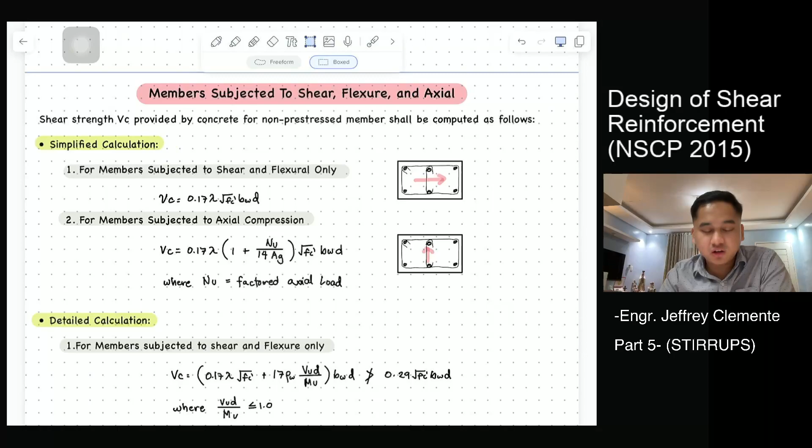So where VS is the same and VC here will be changed. Our VC where member is subjected to shear and flexural is this one: 0.17 lambda square root of FC prime BWD. That's it. But if it's subjected to axial compression, you have to add a factor of 1 plus...

NU over 14 AG. What's NU? NU is the factored axial load. AG is the gross area. That's it, that's all there is. So this is for the simplified calculation.

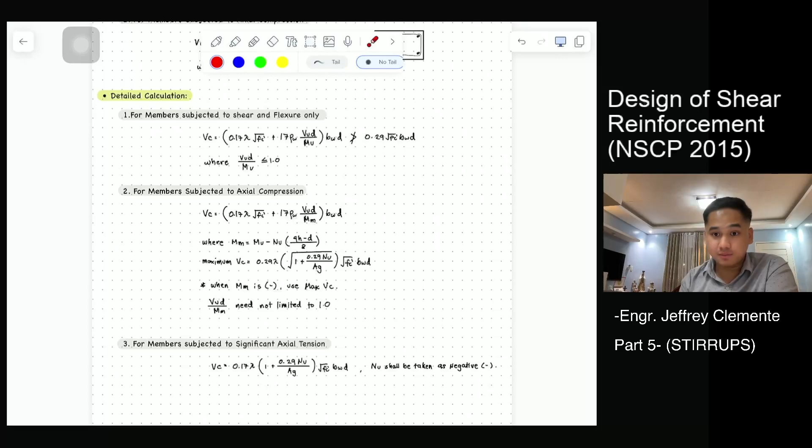For members subjected to shear and flexural only, you have to solve this formula: 0.17 lambda the square root of FC prime plus 17 rho W VUD over MU, times BWD.

But it must not be greater than 0.29 the square root of FC prime BWD. It's not allowed to exceed that. Where VUD over MU must not be greater than 1, it must only be less than or equal to 1. Sir, what if it exceeds 1? Then the answer is 1.

That's it. So when you see this, what is rho? Rho W is just AS over BD, right? In design, that's still from the flexural part. Let's repeat: VU is the factored shear, MU is the factored moment.

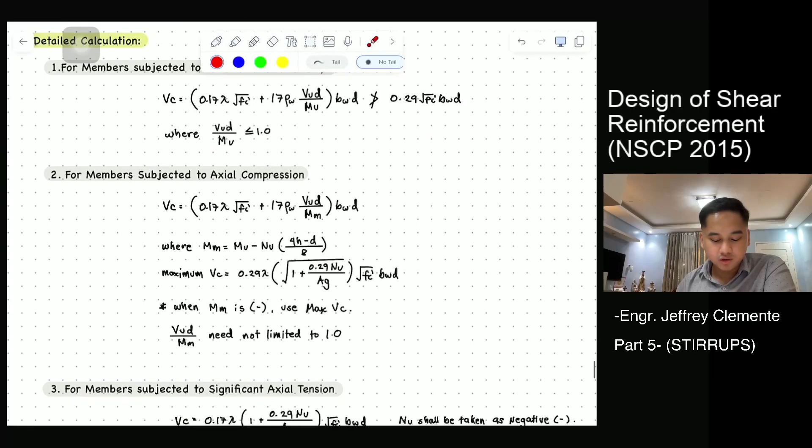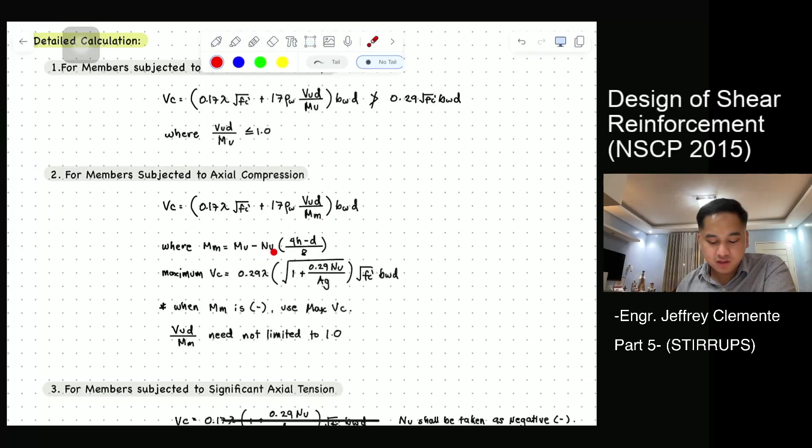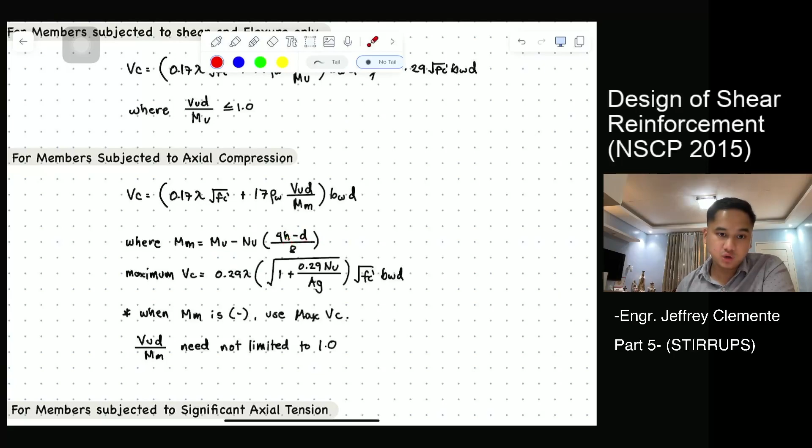What about when subjected to axial, for the detailed calculation? It's still the same, only this MM changes. Here it's MU, here it's MM, where MM is MU minus NU times (4H minus D) over 8. The NU is the factored axial load, MU is the factored moment, H is the height of the beam, D is the effective depth, over 8.

That's it, but it's not allowed to exceed this. This is the maximum: 0.29 lambda square root of 1 plus 0.29 NU over AG, multiplied by the square root of FC prime BWD. Where...

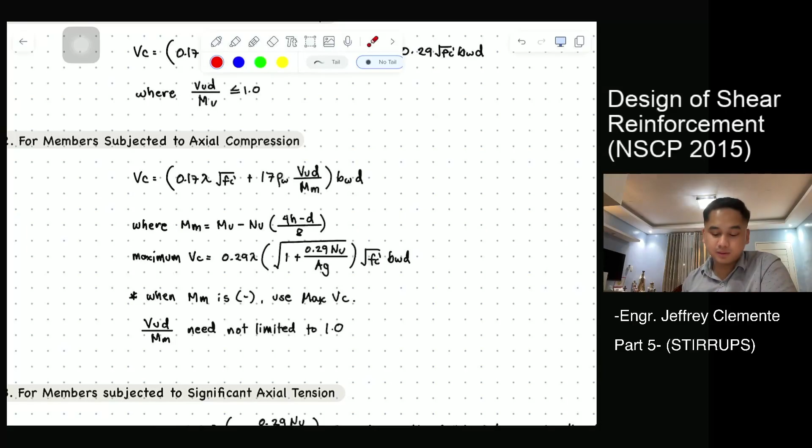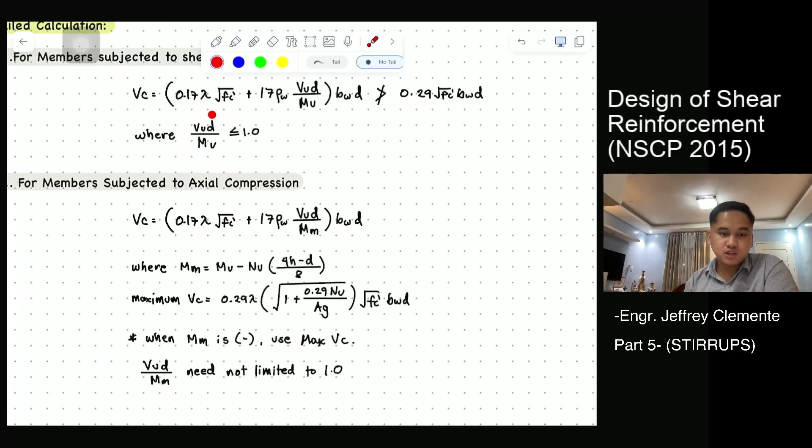Okay? But here, unlike there, VUD over MU must not be greater than 1, it's only limited to 1. In this case, VUD over MM need not be limited to 1, it can exceed 1.

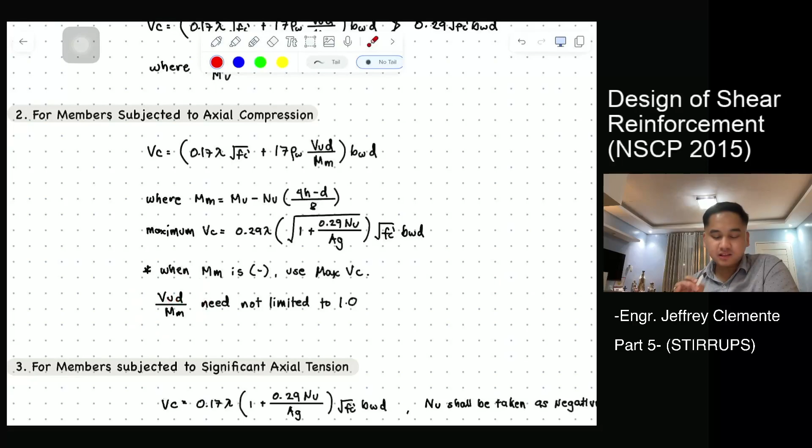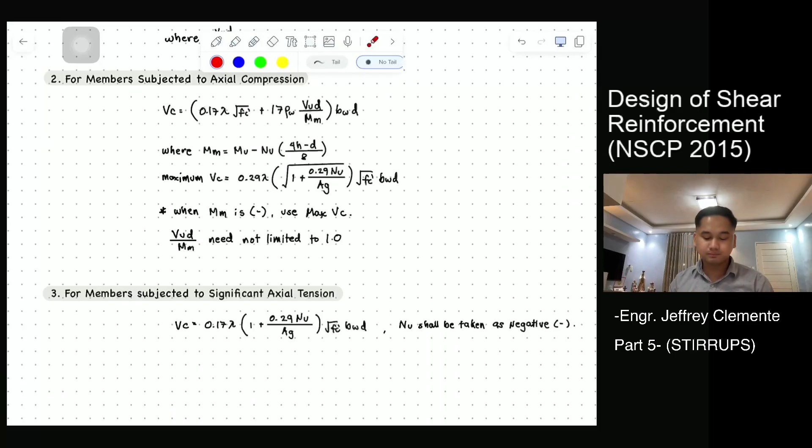Okay, so that's it. When you see this, for members subjected to significant axial tension, because the tension is so strong, mostly what carries it is the steel. So in the old code, they made their VC equal to 0, because only VS was said to carry the weight. But in this case, our current NSCP added an additional formula.

So you have to solve it now, and it must be taken as negative.

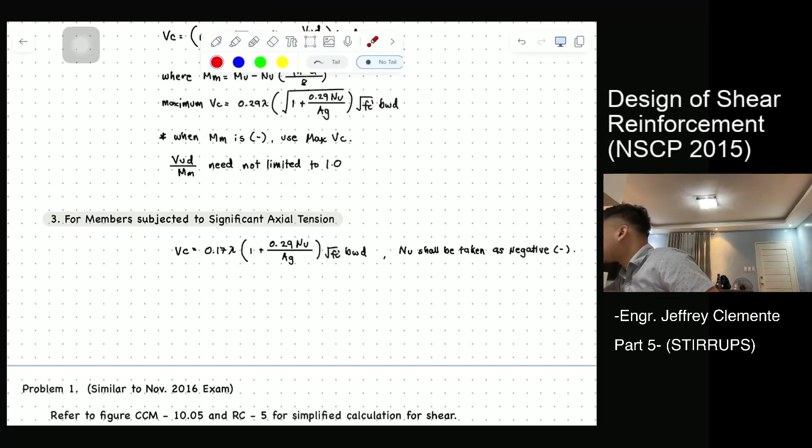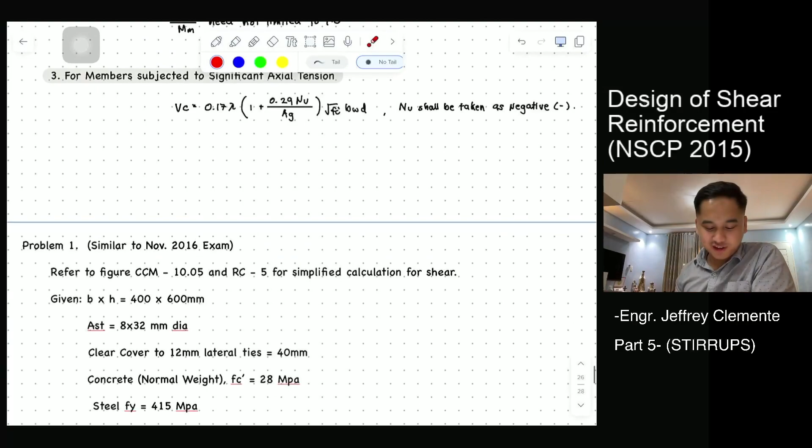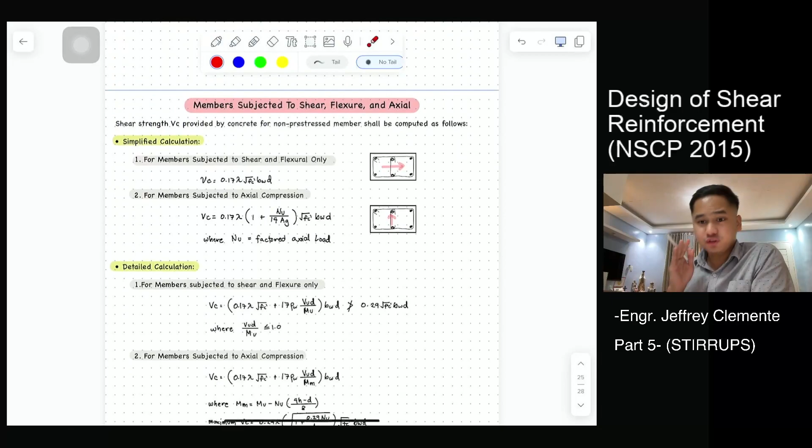So again, this is the simplified and detailed calculation. But most of the time, only the simplified one is used. So what are these two?

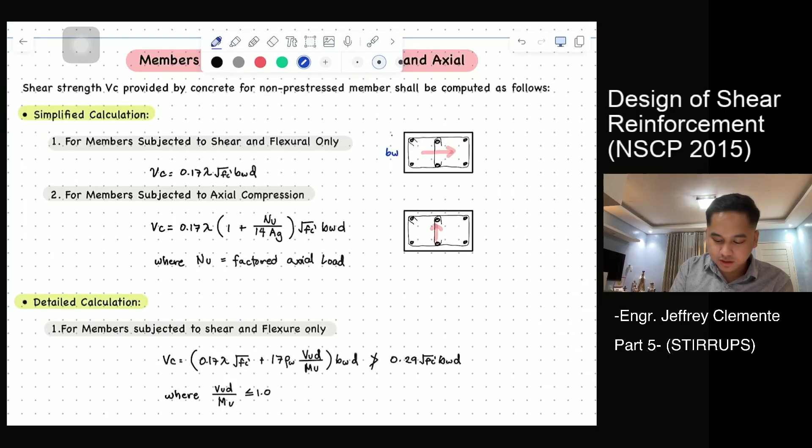So where is BW here? Remember, BW is perpendicular to the load. So this is BW. Okay? And D is, of course, where you measure it. So this is D, right?

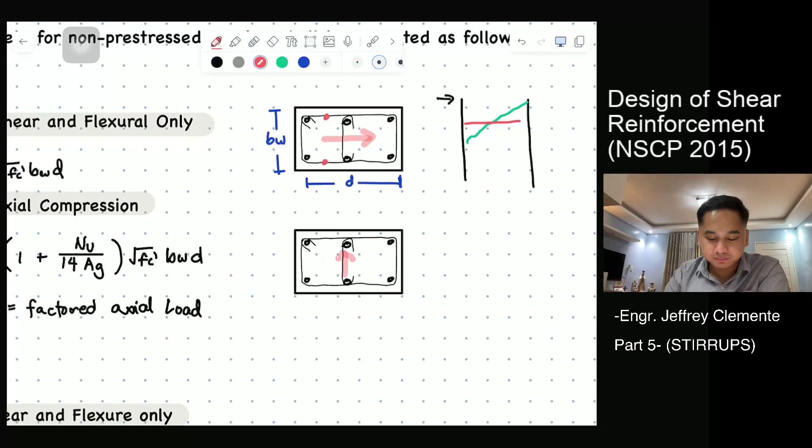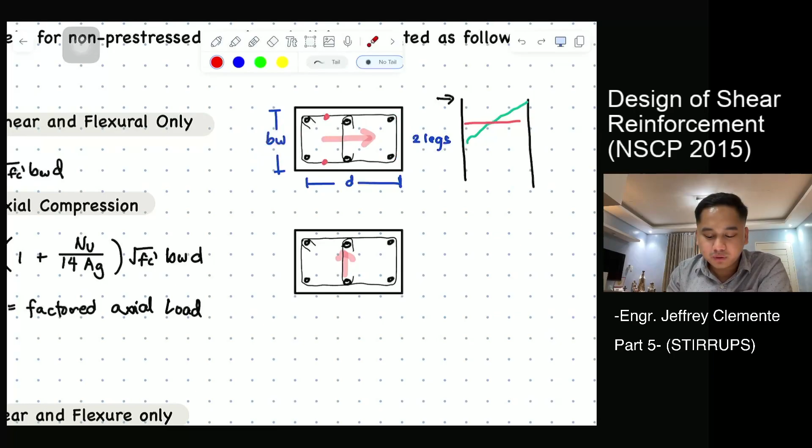Ito ginagawa ko. Bilangin nyo yung parallel doon sa load. Okay? Ilan yung parallel doon sa load? Ilan yung stirrup na parallel sa load? 1, 2. Therefore, it is 2 legs. Okay? So, the number of legs and D, yan, di ba? D and number of legs is parallel to the load. Okay? Ang BW always perpendicular to the load. Perpendicular, 90 degrees. Okay.

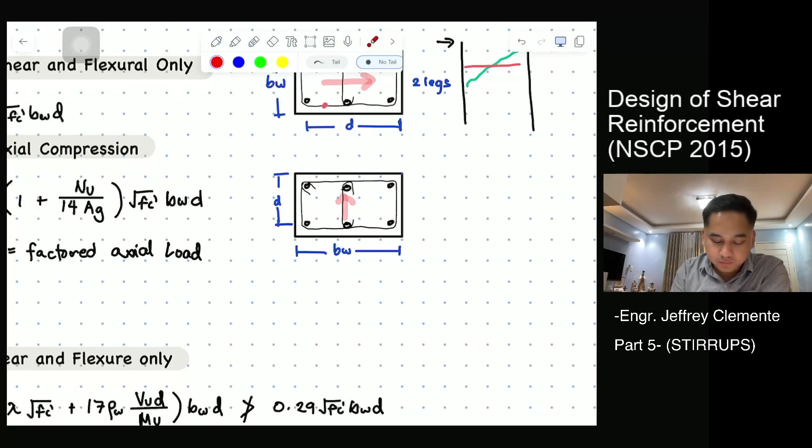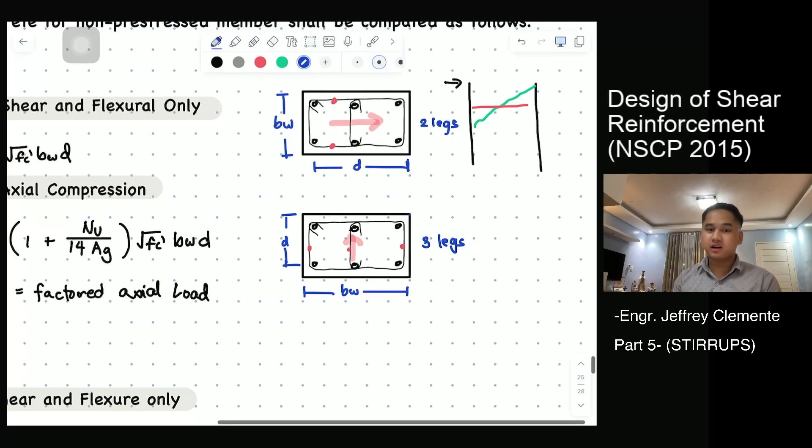Naintindihan? So, yun lang pala tandaan. BW is perpendicular to the load. D and the number of legs is parallel to the load. So, nasabi ko lang yan kasi minsan baka magbigay sa board exam na hindi equal yung stirrups, di ba? Magkaiba. Okay? So, this problem is medyo mahaba. Pero real board exam problem siya. Diba? Similar.

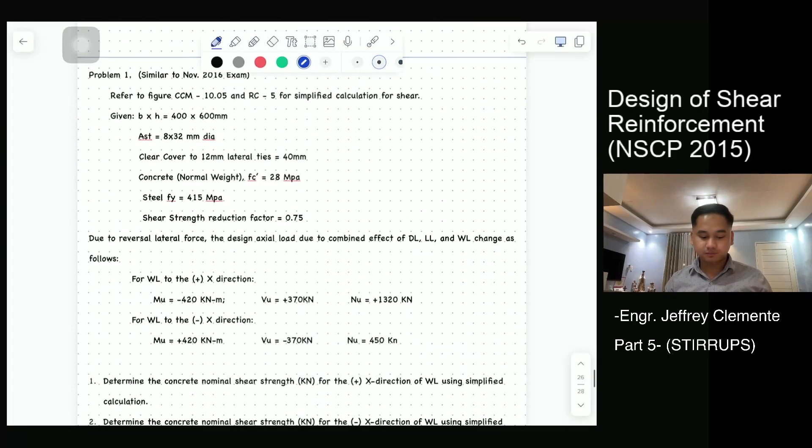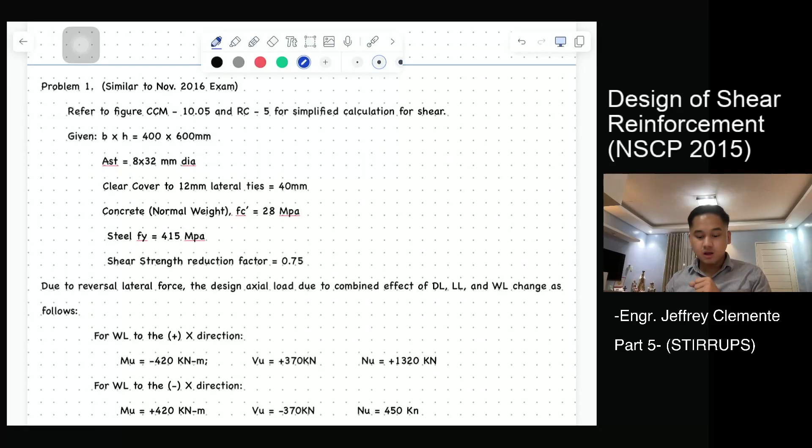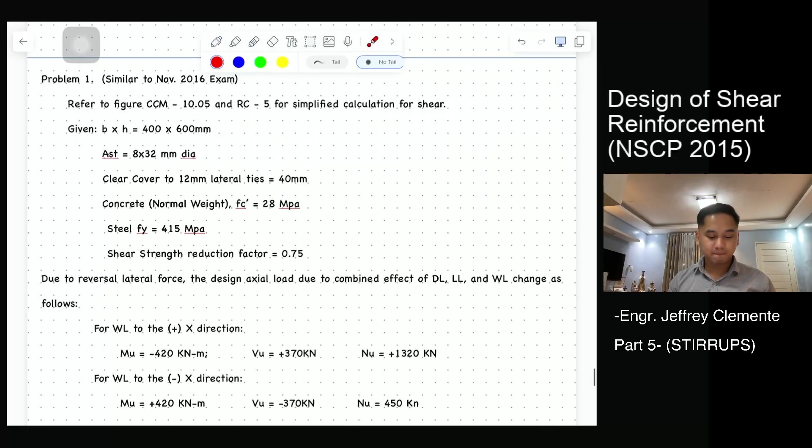So, refer to the figures sa baba for simplified calculation. Binigay kasi yung formula, so gamitin din natin mamaya. So, given B times H, 400 times 600. AST is 8 by 32 mm diameter, walong bakal na 32 mm diameter. Clear cover to 12 mm lateral ties is 40 mm. Concrete f'c is 28 megapascal. fy is 415. Hindi binigay fyv, so assume na ito rin yun. Shear strength reduction factor is 0.75. Kahit hindi ibigay yan, dapat alam nyo.

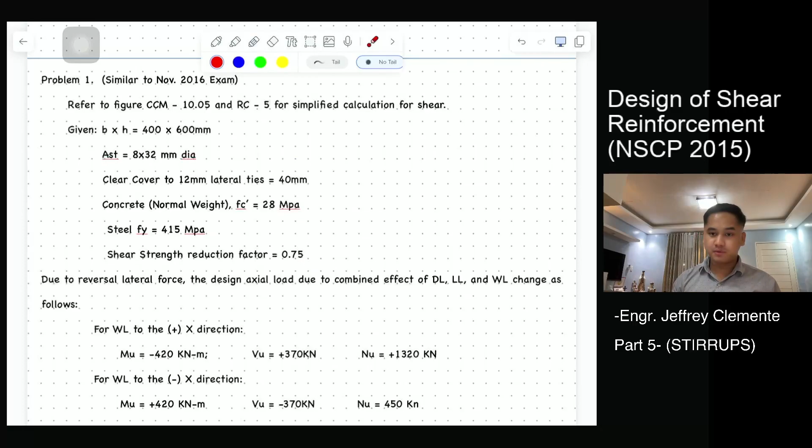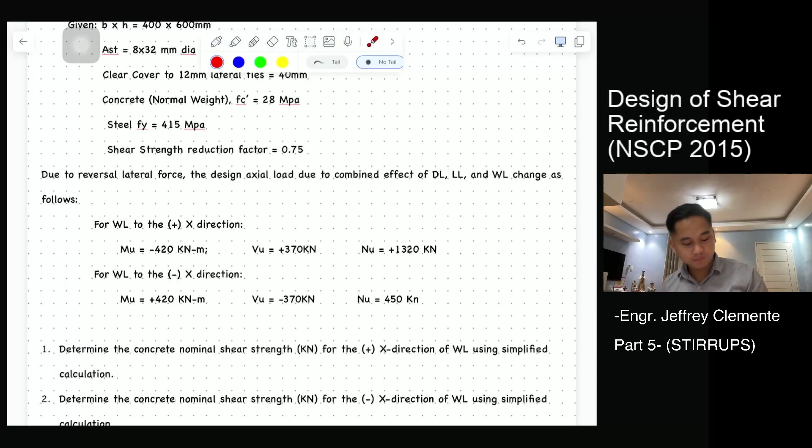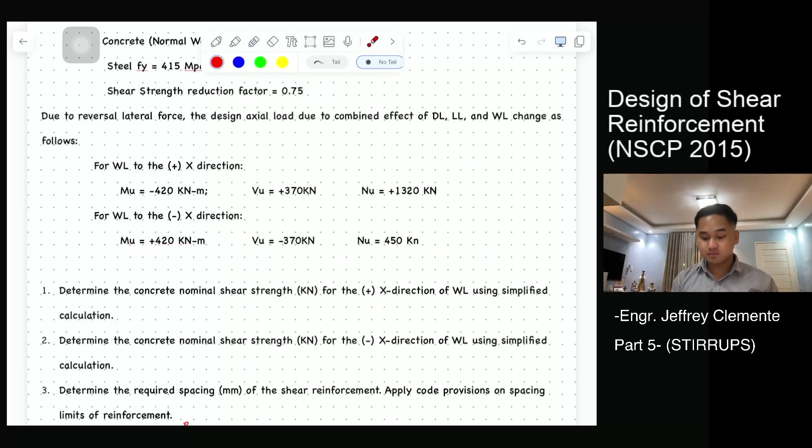So due to the reversal lateral force, the design axial load due to combined effect of dead load, live load, and WL change as follows. So meron siyang wind load. For wind load due to positive x direction, ito yung mga load niya. Mu negative 420, Vu is positive 370, Nu is 1320 kilonewton. Pag negative x direction naman, ito yung load niya. So, you have to check it both. But no problem kasi isa-isa naman siya sa problem.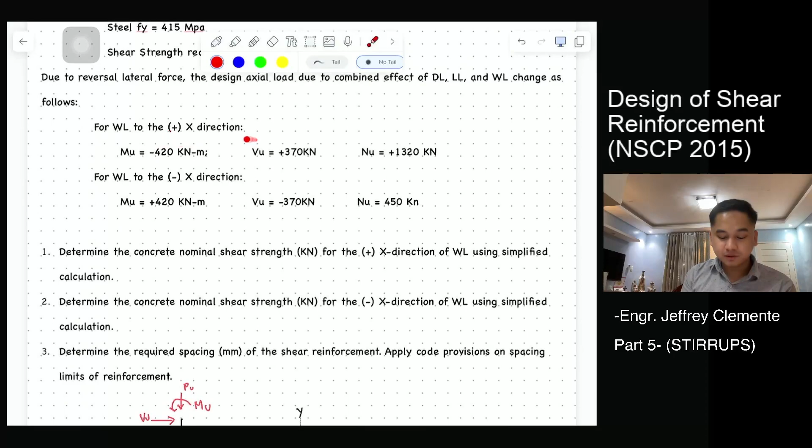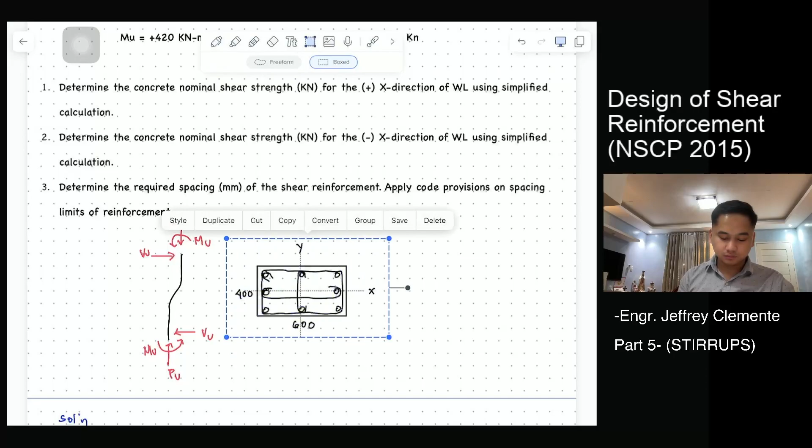So, for the first question, determine the concrete nominal shear strength for the positive x direction, simplified calculation. So, tinatanong lang dito is nominal concrete strength. So, that is just Vc. Using this, positive x direction. Ito yung figure. So, for problem number 1, copy natin to kasi given yan. Ang load daw, papunta sa positive.

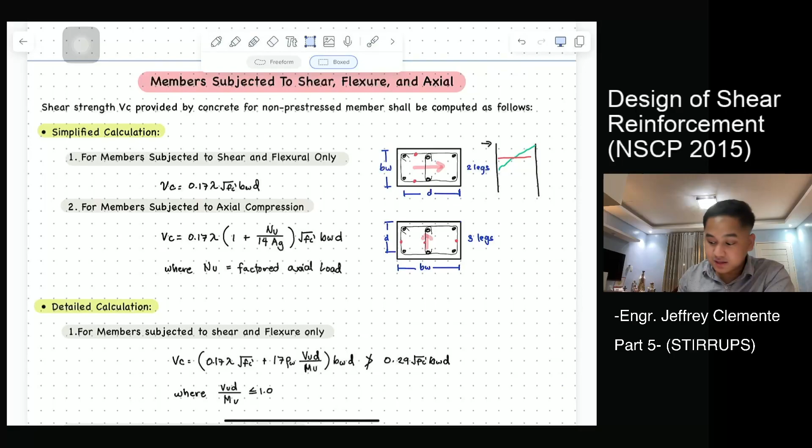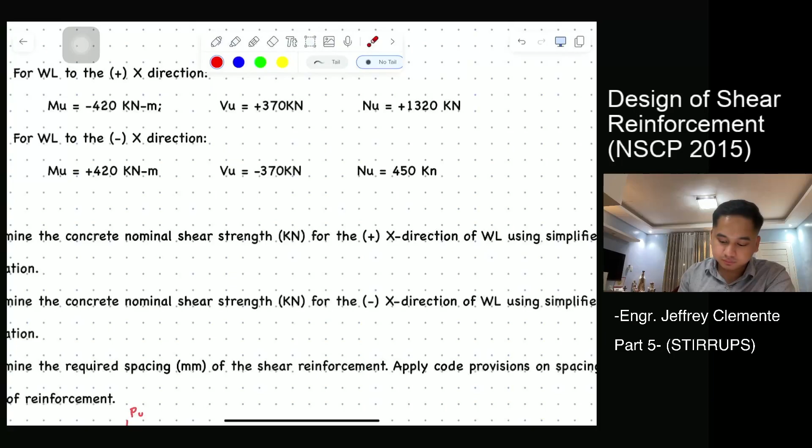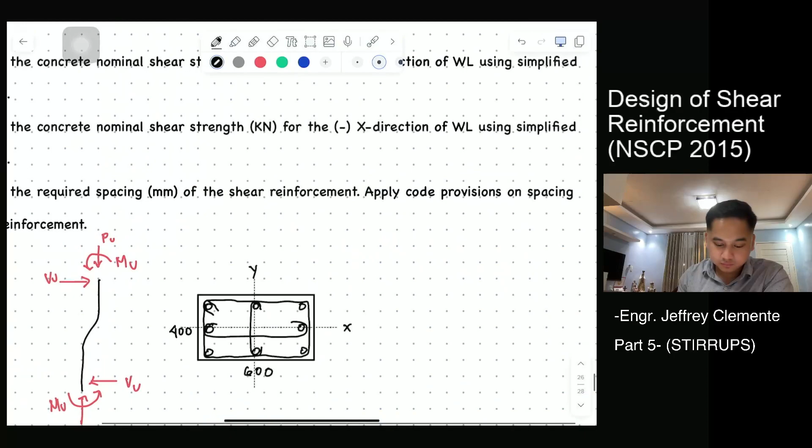So, you solve 0.17, 1 multiply by 1 plus NU. Anong NU natin? 1320. Ito sabi yung 1320, positive x direction. But kilonewton siya, you have to make it in Newton. 14 times yung gross. Gross, 400 times 600. Multiply to the FC prime, which is 28. Diba?

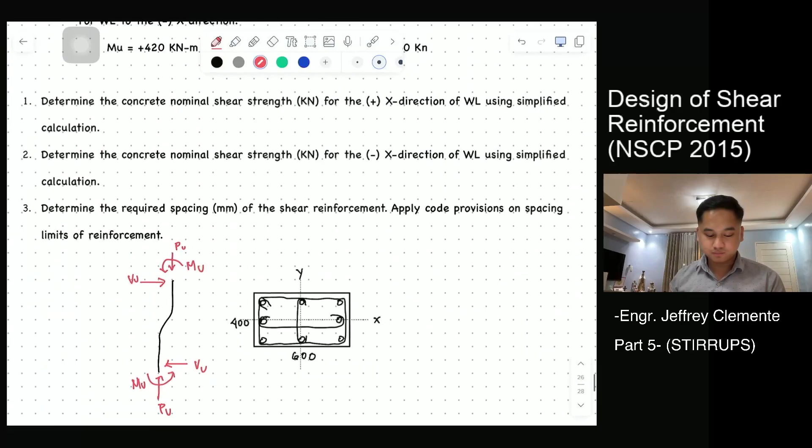BWD is 400 times D is 532. Therefore, our VC is 266.63 kilonewton. So, yun lang. So, yun yung answer doon sa first question, 266.63 kilonewton. Okay?

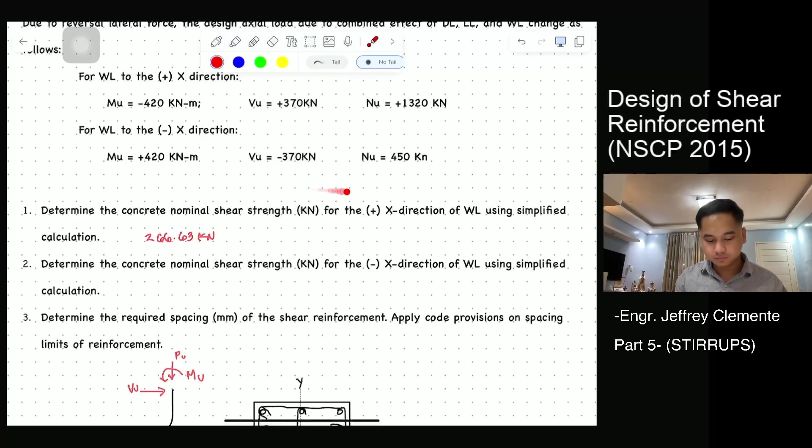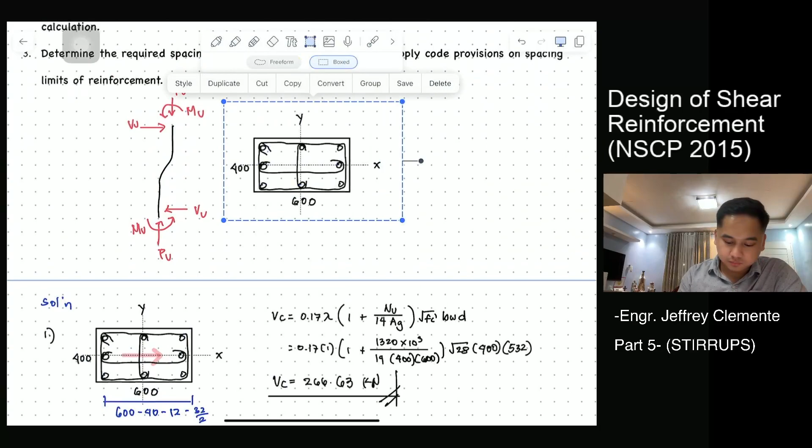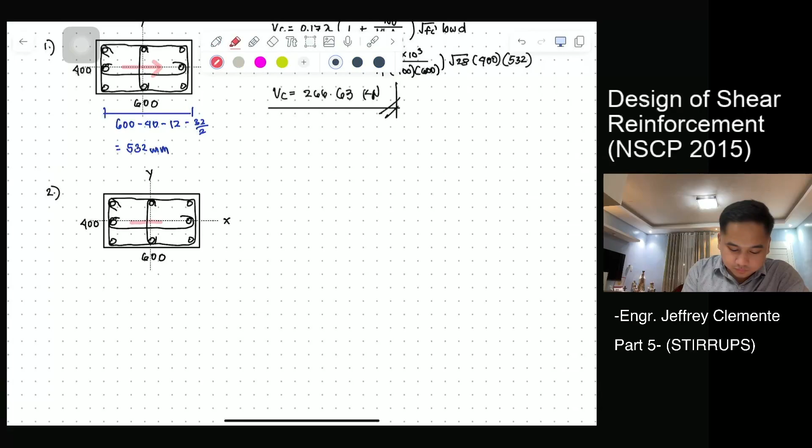For the next, determine the concrete nominal shear strength KN for negative x direction WL using simplified calculation. So, ito na daw ang gagamitin natin. Ito load dito. Okay? So, ganun ulit. Copyhin ko to para mas ma-visualize nyo. For number 2, our load is negative na, diba? Pupunta na dito, sa kabila na. So, dahil may axial siya, ito ulit gamitin natin. Okay?

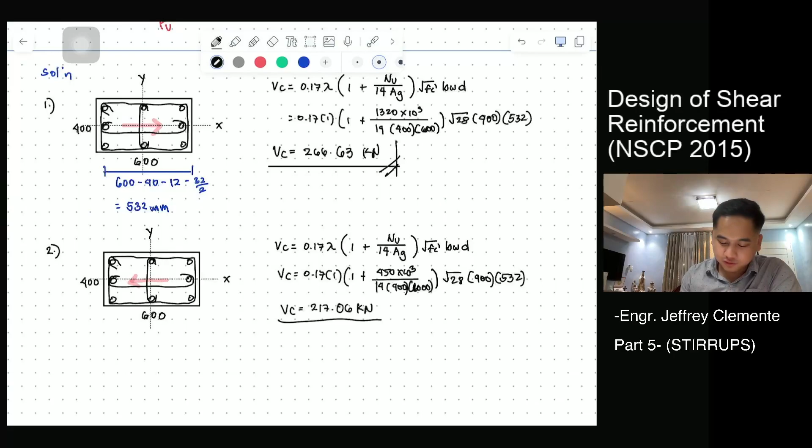So, VC is 0.17, 1 multiplied by 1 plus NU. Ang NU natin, in this case, is 450. So, 450 times 10 raised to 3 all over 14 times 400 times 600. Square root of FC prime, 28. BW is 400. D is 532. Therefore, our VC is 217.06 kilonewton. Okay? So, yun lang. So, 2 points agad sa board exam. 217.06 kilonewton. Okay?

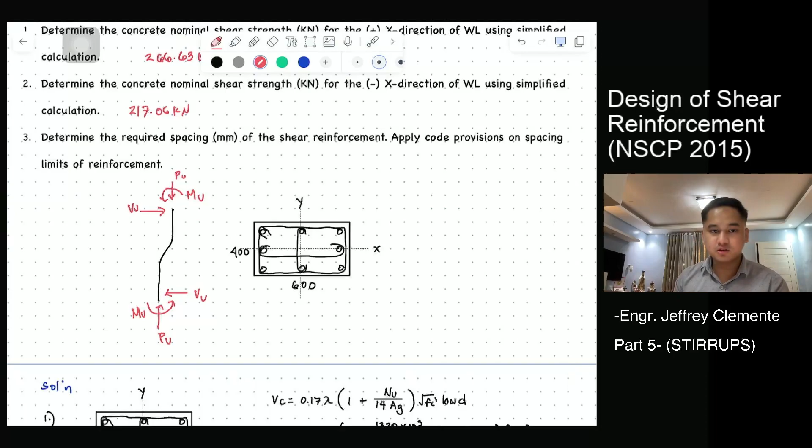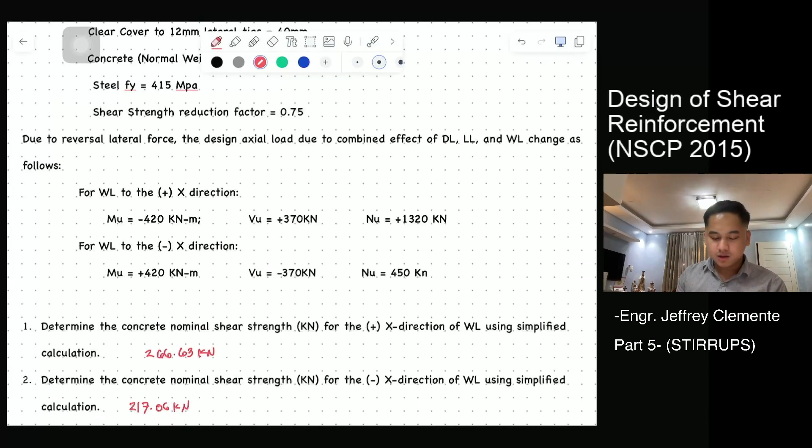So, for the next problem, determine the required spacing of the shear reinforcement. Apply code provision on spacing limits of reinforcement. Paano yun? Kunin natin yung VU, which is meron na tayong VU. Solve for VS. Depende kung ano yung gagamitin natin na VU. Dalawang VU natin, parehas pa sila. Sign lang pinagkaiba, sinabi lang kung saan papunta. Check mo yung dalawa pag sinolve mo yung VC, positive at negative x, sino nakuha mo?

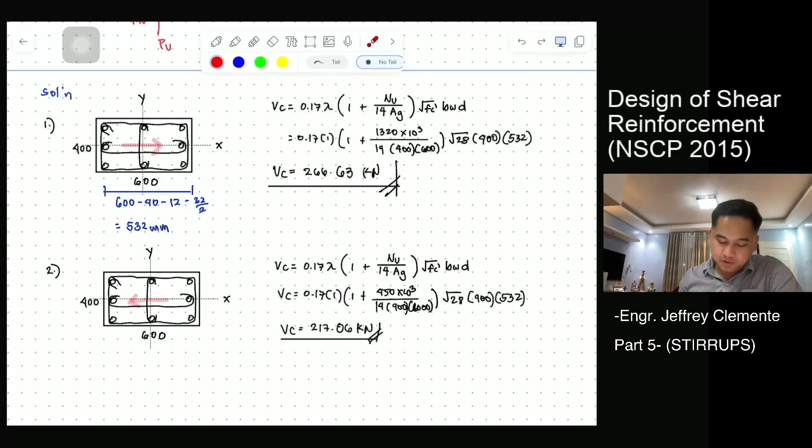You choose the smallest. Yung pinakamaliit. Why? You have to assume the worst. Pag in-assume mo ng pinakamalakas, baka bumigay siya sa maliit. So, para pumasa siya, ang gamitin mo yung mahina. So, solve natin ang VS: VU over phi minus VC. Ang gagamitin natin yung smallest. Ang VU natin is 370. So, 370 over 0.75 minus 217.06.

Namamalat na si sir.

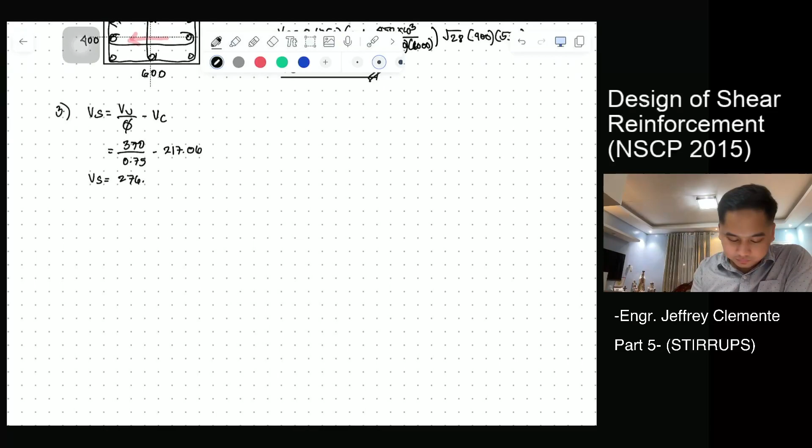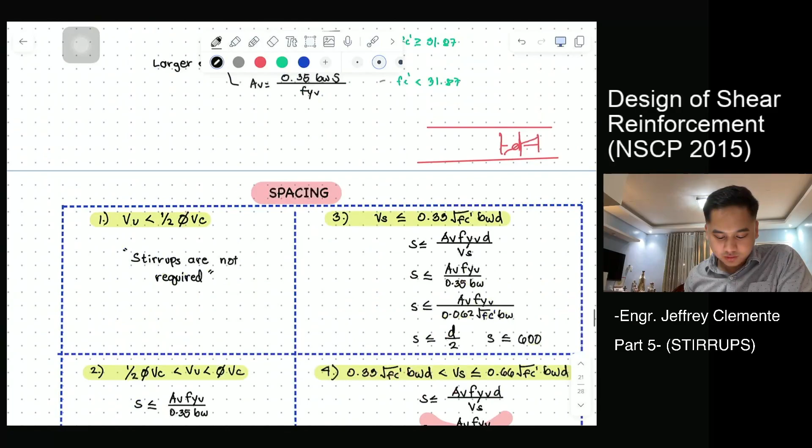Okay. VS is 276.27 kilonewton. So we can say here, our VU is 370, but our VC is just 217. So sure yun na hindi na siya bababa ng phi VC and half of phi VC. So in this case, hindi siya lalagpas dito. Sure yan, dito na yan.

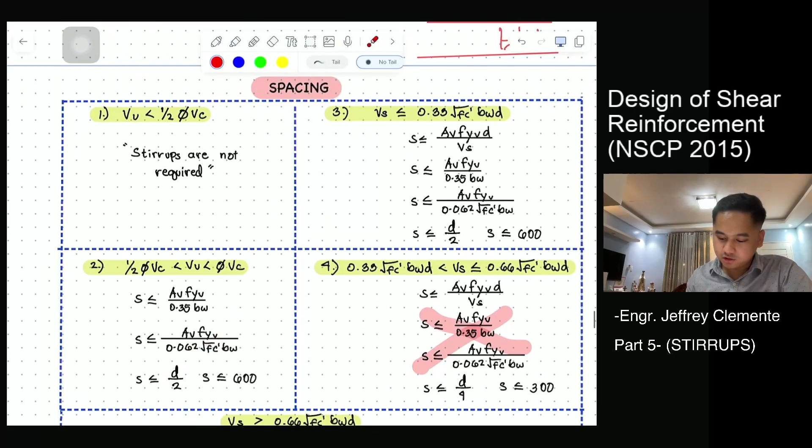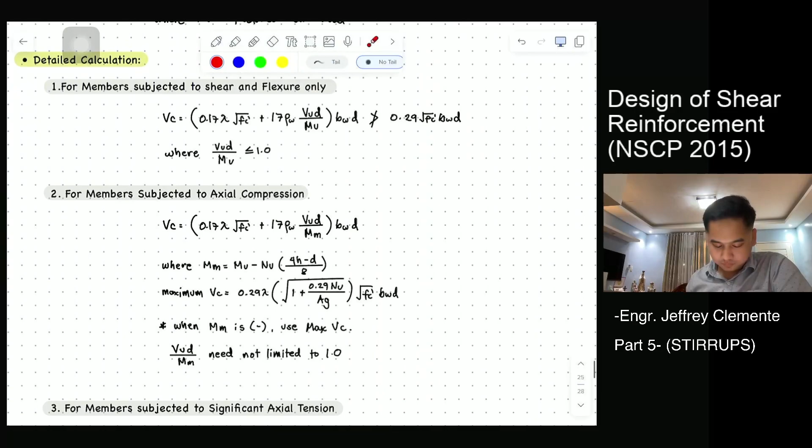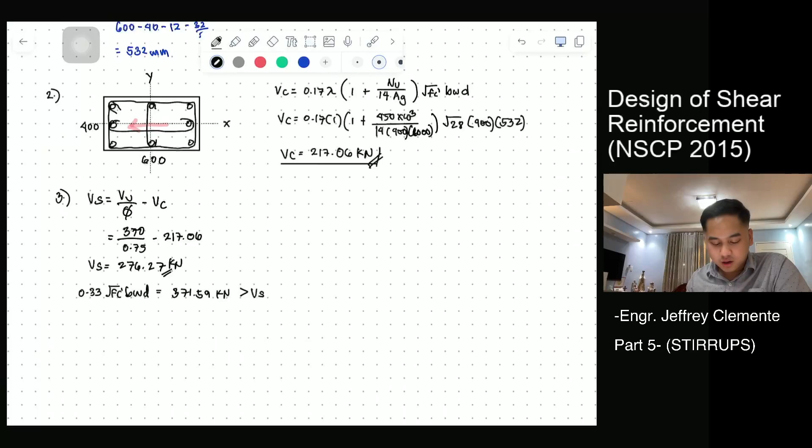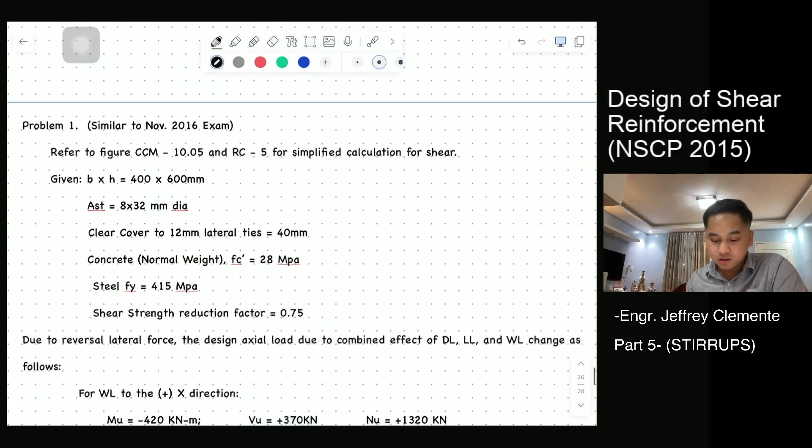So, now, let's solve for limit state of 0.33 square root of FC prime BWD, and 0.66. Pero ito muna, try natin to, baka pasado dito. Ang lalabas na value is 371.59 kilonewton. So, this is greater than VS. What can we prove? We can say that VS is less than 0.33 square root of FC prime BWD. Therefore, we will be using this formula. Gamitin natin siya.

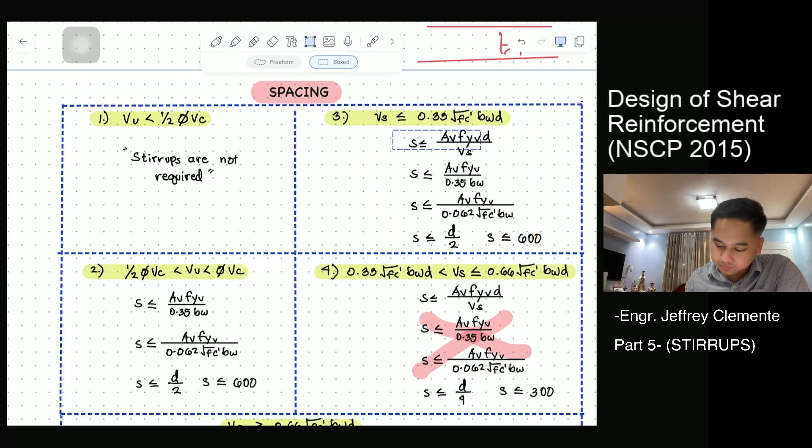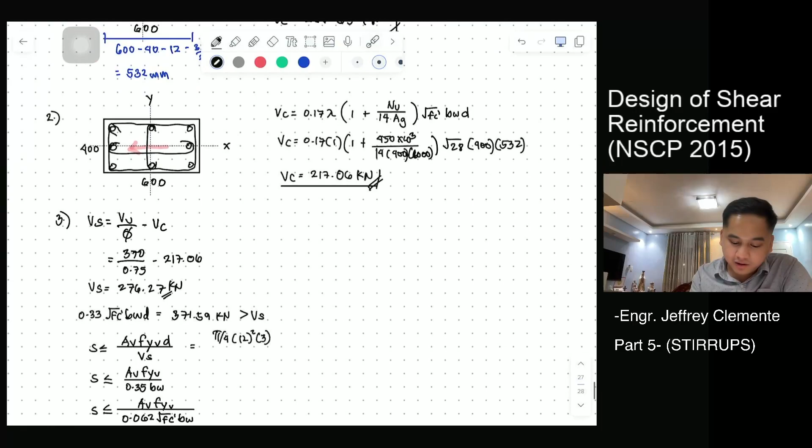Gamitin natin. Ito paghiwalayin ko. Ulit lang, ganun pa rin naman, nagkaiba lang pagkuha ng VC. Dahil dalawa yung condition natin, you get the smallest VC. In this case, we'll have AV. AV natin is pi over 4 multiplied by 12 squared times 3 legs. Hindi naman sinabi, pero parallel to the load, 3 legs. Nagkataon lang na tatlo din yung perpendicular.

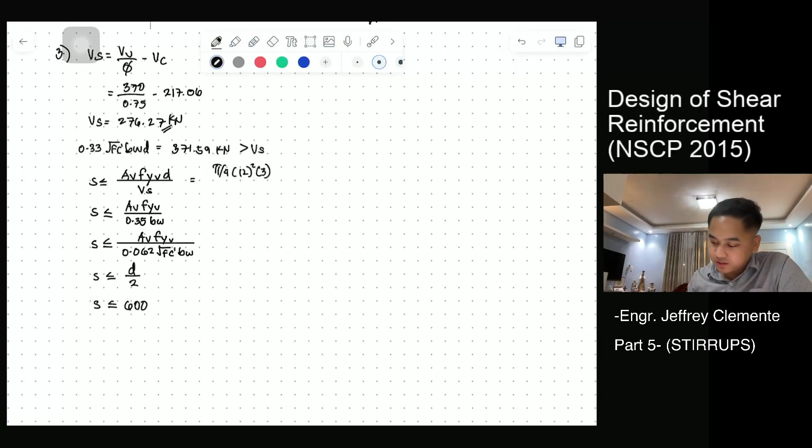So, we have 3 multiplied by 415 multiplied by D, which is 532, all over 276.27 times 10 raised to 3. Therefore, this will be 271.14 mm. In this part, pi over 4, 12 squared times 3 times 415 all over 0.35 BW, and BW is 400. Ang lalabas is 1,005.76. So, malabo siyang pumasa dyan.

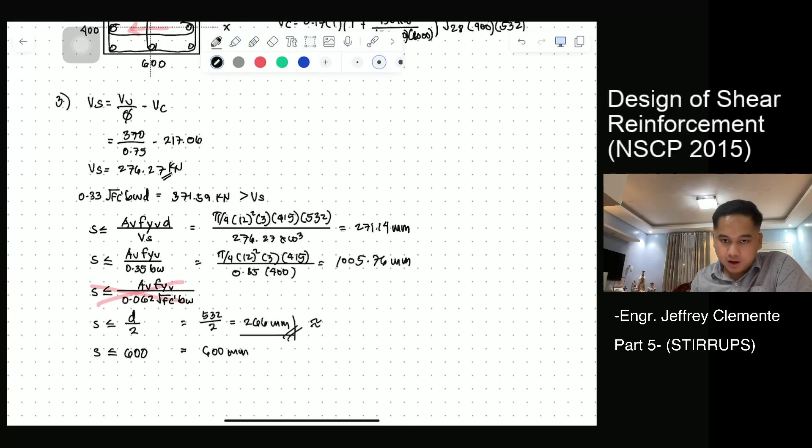Hindi ko na ito i-check, hindi na yan mag-govern. I-solve on your own. Here, D over 2, D is 532 over 2, so 266 mm. Here is 600. Ano yung smallest? The smallest is 266. So, if we have an increment of 5, the answer is 265. Lagay ko dito 265 na lang.